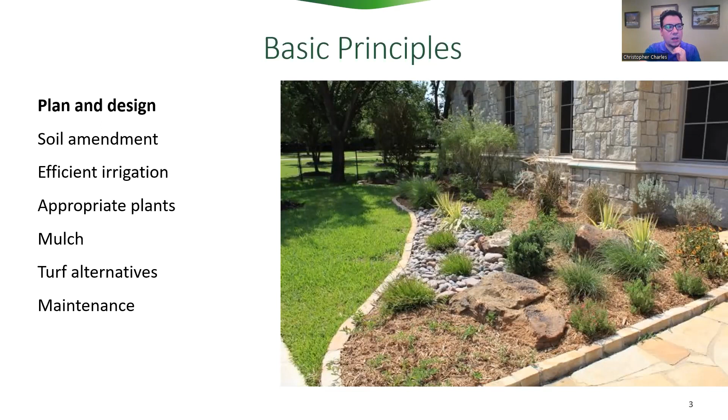As far as turf alternatives, you might have seen things like in this photo here, where they put a little bit of that stone there, and maybe some people will put artificial turf. We're really looking, as far as turf alternatives, at maybe using some native grasses or ground covers. We're trying to stay away from rock and artificial turf, and I'll go through that in a little bit.

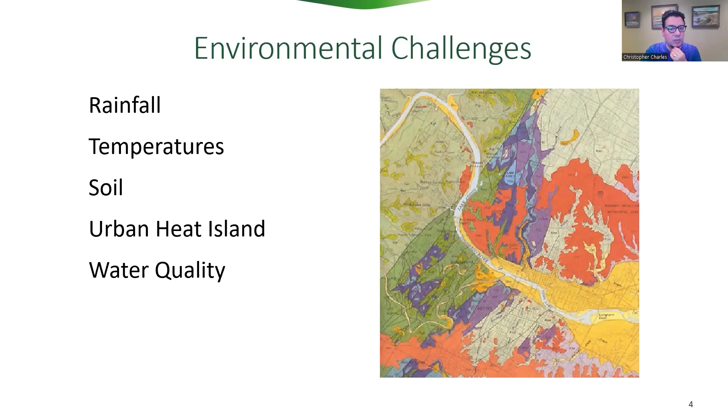So some environmental challenges - you got to understand the local climate. For some people, Austin's a brand new city. All you know is that there's so many allergens right now. But no, we need to really think about what our climate is, how much rainfall we get, look at the temperatures, the soil. What is this urban heat island thing that everybody's talking about here in town? And of course, we always want to take care of our rivers and streams, so we always focus on water quality when we design landscapes here and around Austin.

This was just showing you the vast amount of rain Texas gets - Houston getting 50 inches, Marfa getting around 15 inches, and Austin's right in the middle. One interesting thing is that Austin gets around 34 inches of rain a year, and Seattle, everybody thinks of as a wet town, gets 38 inches per year. The difference is we get all of our rain in maybe 3 or 4 big storms a year, these 3 to 4 inch rains, while Seattle usually gets a consistent amount of rain each year, which is good for their watershed and water supply.

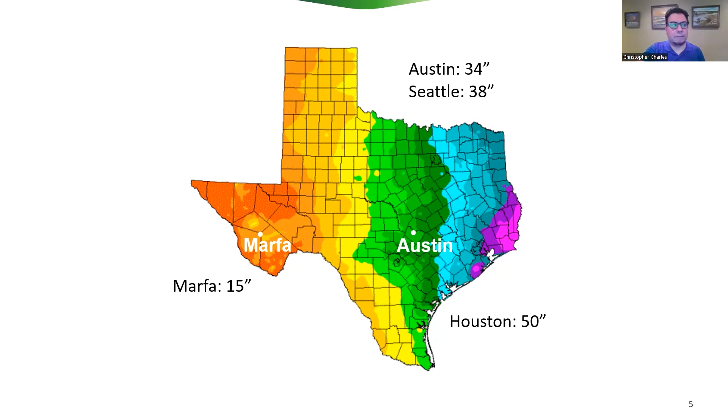Temperatures - a lot of people will look at cold hardiness when they're buying plants, asking will it survive the temperatures here. I just want to let everybody know that plants also have a heat hardiness. You can't plant some of those northern plants here in Austin. What I see a lot is people trying to plant hostas - yeah, they do great in Michigan, but they're not going to be doing good here in the Texas heat. So really look at the temperatures - if you're from out of the city, even if you're from Dallas or even from the Valley, the plants that you're used to might not grow here. So you might want to look at temperatures when you're doing your landscape.

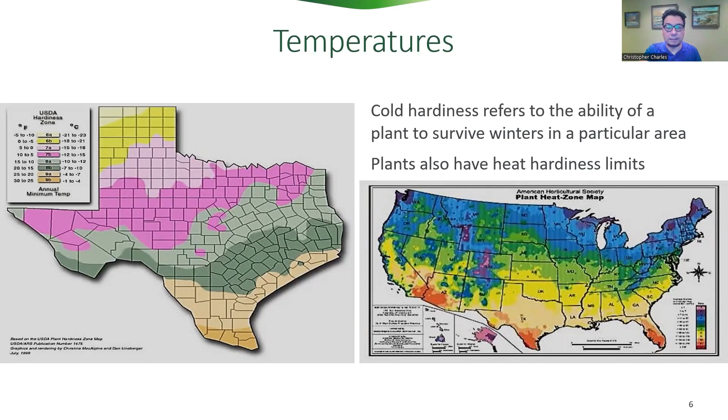Another thing to look at is soils. This Austin area soil is notorious for being shallow, poor, and hard to manage, though that's more true on the west side of Austin. The east side has much thicker, more clay-like soils, so you'll have an easier time digging. On the west side, there are a lot of karst formations and limestone that you really need to take into consideration.

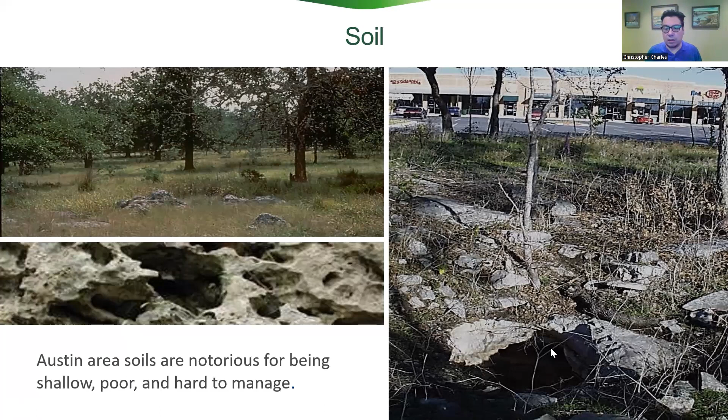Urban heat island is something you might hear about now and then, and Austin's really big on this. The sun bakes down on impervious surfaces, including buildings, creating hotter temperatures in the center of the city compared to the outer rim where there's more trees, forest, and parkland. This is basically Austin, and you can see red streaks going down, like South Lamar, south of the river, and I-35 right down the middle. The cooler temps are in the older neighborhoods away from the streets, where there's nothing but residential and lots of mature trees. So, are you in a cool zone or a hot zone? That's basically what this infrared imagery shows.

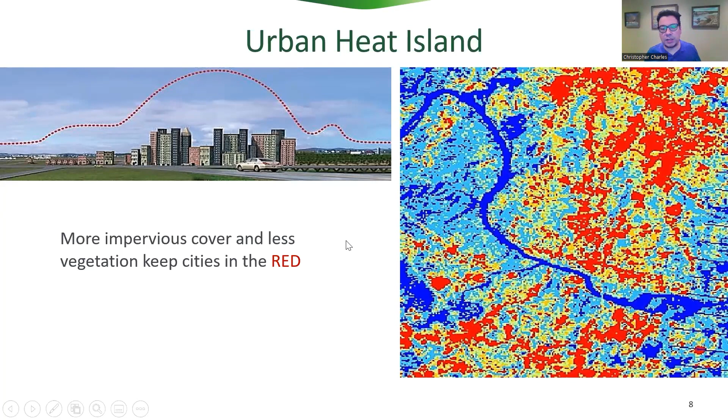Water quality, as we mentioned, we really want to protect our streams and rivers. We also want to make sure that water goes through the soil and infiltrates instead of causing erosion issues. And then there's pollutants as well. We'll be talking about fertilizer later on, and how we don't want that in our creeks and rivers.

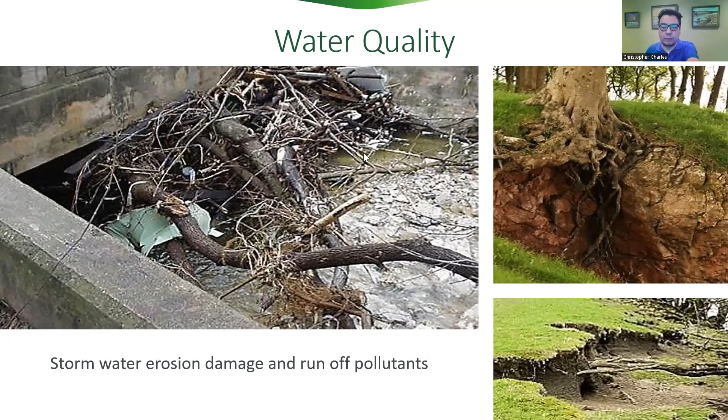Some of the solutions we have for landscaping, looking at everything we talked about previously, is to develop a smart design. I'm not asking you to be landscape architects, but really think about the things that matter to you in your landscape, and how you can environmentally better the situation. Keeping water on the land is always important. A long time ago, the thing was to gutter that water, shoot it down your driveway into the street where it won't damage your property. That's an old way of thinking. Now we do want water to drain away from your house, but we want to try to slow the flow as much as possible.

Consider soil amendments—we'll talk about that a little bit. Use native and adapted drought tolerant plants, create cool spaces, and reduce lawn that isn't being used. If you are using your lawn, then please maintain it in a responsible way, with the type of maintenance that doesn't do damage.

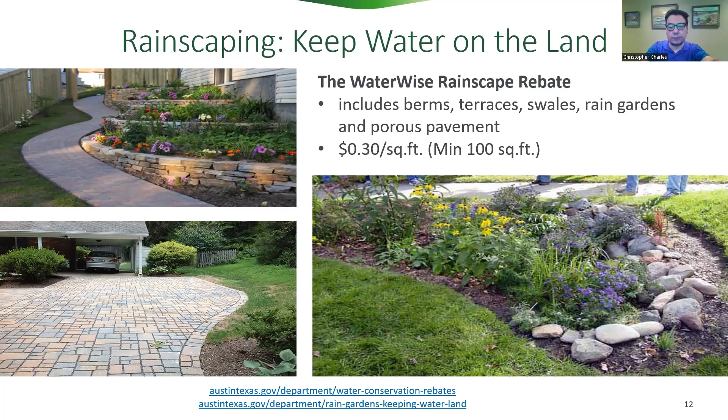Rainwater harvesting - I do have a lunch and learn, I just want to go ahead and put that out there, and I think Pat's going to go ahead and put that link somewhere where you can see it. I'll be talking about this program in major detail for people that are not familiar with this rebate. It's very, very popular. We've had a lot of businesses promote our program because they do like the amount that we're giving.

We're giving 50 cents per gallon for a non-pressurized system, meaning gravity released. But once you put a pump on there, we call it a pressurized system, and we'll give you $1 per gallon. Anything over 500 gallons that's pressurized will need a backflow prevention. That's a requirement, and that's why we're giving a little bit more money for those pressurized systems.

We have a max rebate amount of $5,000, and if it's going to be over 500 gallons, you're going to need to get pre-approved. That's because we want to make sure that we have the funds for you - we don't want to run out of funds midway through your project. It does take a little bit of time, but it's worth it in the end.

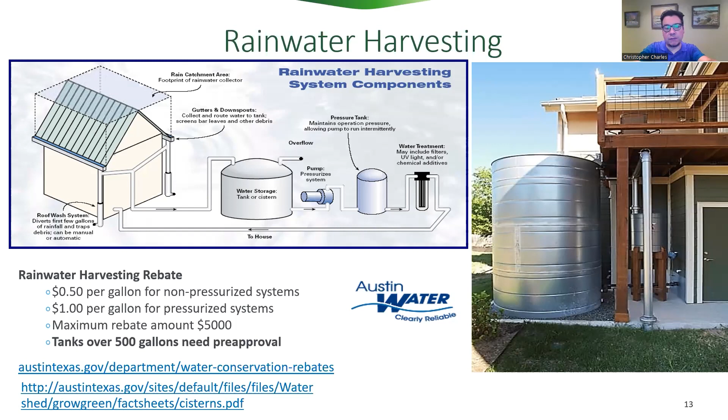One thing that we have going on right now is laundry to landscape. That's basically using gray water, water that comes from your washing machine. If you want to try this simple plumbing thing - basically a three-way diverter that diverts water from your laundry out into the landscape and into a mulched basin - we can give you some money for that. There's more information on that, but it's also good to use gray water to conserve our natural resources.

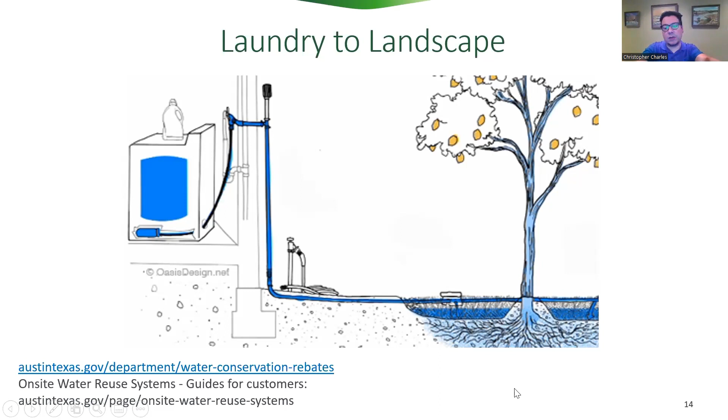So, soil options - there are three things I have here. You can work with what you have: if you only have an inch or two of soil, you can work with that, you might need to add some extra soil or some compost to thicken it up. Of course, amending soil is the next thing - always good to add some kind of compost, mulch, something that will break down and add nutrients to the soil, to make it more viable, to allow the plants to extend their roots and stabilize it.

If you're on a slope, it's always good to use raised beds so that whatever you use—this example is a stone, like river rock—is contained. I don't mind people using gravel or stone if it's in a raised bed where it's not going to go into the street, not going to wash off, and it's going to stay put.

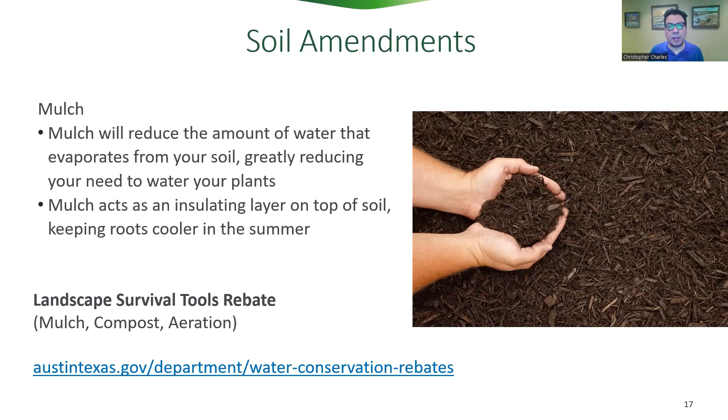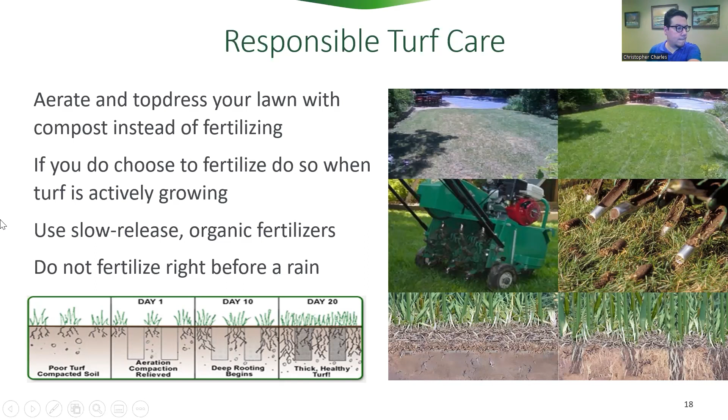A little bit about native and adapted plants. Grow Green has the native and adapted landscape plant guide. You don't need to really know too much about plants to know what works here in Austin.

Another thing we were talking about before is minimizing turf grass in the yard. Now, how are you using the turf grass? Like I said before, dog run, playground, etc. If you're not using your turf grass—lawn, I'm sorry, in the industry we call St. Augustine, zoysia, Bermuda, buffalo, all those grasses that you plant and mow, turf grass—so how are you using that turf grass?

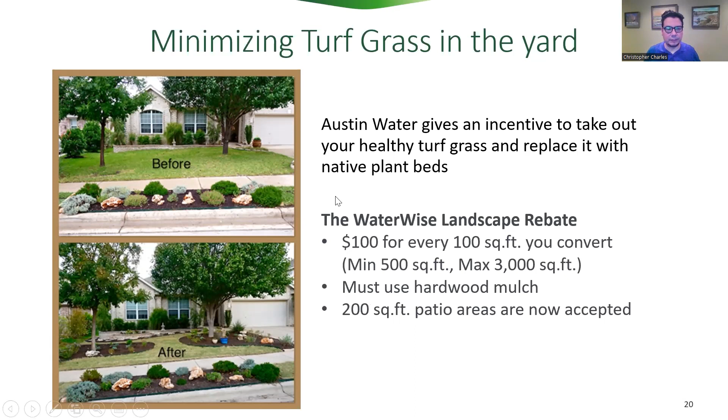Hydrozoning is a term you might not be familiar with. Basically, what we're talking about is where you're going to place the plants, right? If you have a lantana, they like full sun—they actually like the evening sun—but where are you going to put it?

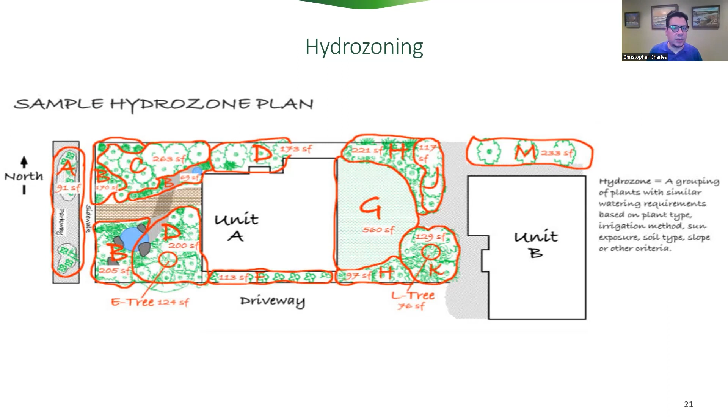Of course, if you look at area D, that's going to have all day shade. So you might want to put something like Turk's cap there, or something that can handle shade. Maybe take out the grass in that area, since it's not going to get enough sun because the house is blocking it. So think about that. That's all hydrozoning is—making sure that you're planting in groups that make sense.

Also look into permeable pavement—I talked about that. We do have a rebate at Austin Water for this. It does cost a little bit, but in the long run you're helping out the infiltration of stormwater. And then think about shade structures as well.

And then, of course, lighter colored pavements. I've seen there was a big trend to use—what do they call it—some black gravel, I think it's called shale, or some kind of chat gravel. If you put it in the shade, I don't see that being a big issue, but if it's going to have any amount of sunlight, that black gravel is just going to heat up and create that microclimate. You're going to go outside and wish you weren't outside because it's so hot. And that's not good—please try to pick lighter colored pavements when thinking about using any type of stone or concrete.

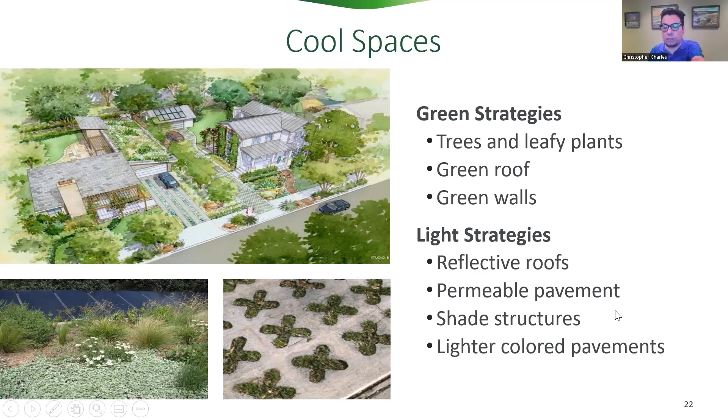I think everybody knows the importance of trees, so I'm not going to go too much into that. It increases your home value - I know I wouldn't have bought my home if I didn't know there was mature trees on it. I thought that was really great. It shades my house part of the day, not all day long, but part of the day, which helps out with energy savings.

One other thing I wrote in my notes - if you're going to try planting trees, try planting on the south and west sides of the house. That way, once they're mature, they'll be able to give you shade on your house and any concrete you have, like driveways, sidewalks, or anything like that.

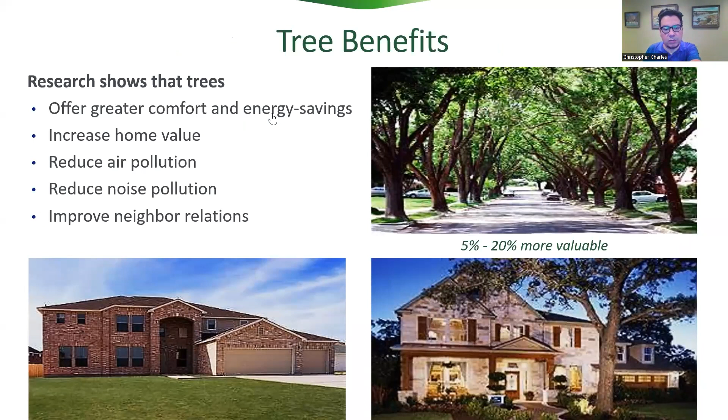Integrated pest management - now, with more plants and less grass you have, you're going to have different plant issues. So you might look into beneficial bugs. There's a lot of resources, like I keep going back to this Grow Green website, but there's lots of resources for it. There's other ways to keep plants healthy without using pesticides, so look into those options.

Some of your nurseries will have organic products which are safe for all your lawn care needs - sulfur powder, different types of diatomaceous earth that will deal with pests. Safe for your pets, bad for pests. So look into those products at your local nurseries.

That is about it for me. I can go forever talking about our water conservation programs, but this is about sustainable landscaping. If you have any more questions, please call our main line or go to waterwiseaustin.org and check out our residential rebate programs. We do offer irrigation audits for those using over 20,000 gallons per month - believe me, that will happen. Some of you might have had a broken irrigation system where the water just kept running, or had multiple run times and didn't understand what was going on until it was too late and you got a high bill. So please check out our website and other things we have on there.

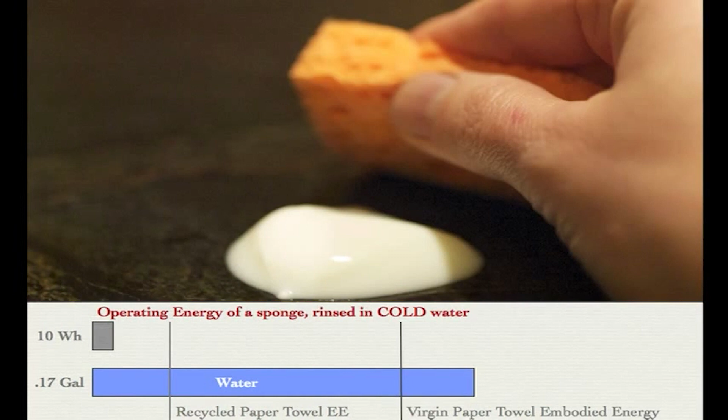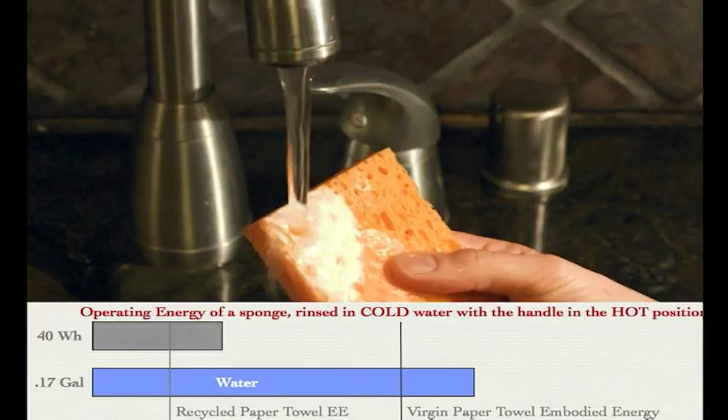But what about a recycled paper towel that comes in those little half sheets? Well, now the paper towel looks better. Screw the paper towels, let's go to a sponge. I wipe it up with a sponge, put it under running water, and I have a lot less energy and a lot more water. Unless you're like me and you leave the handle in the hot position even when you turn it on, and then you start to use more energy. Or worse, you let it run until it's warm to rinse out your sponge. And now all bets are off.

So what this says is that sometimes the things you least expect, like the position in which you put the handle, have a bigger effect than any of those other things you were trying to optimize. Now imagine someone as twisted as me trying to build a house. So that's what my husband and I are doing right now. And so we wanted to know, how green could we be?

There's 1,001 articles out there telling us how to make all these green trade-offs, and they are just as suspect, telling us to optimize these little things around the edges and missing the elephant in the living room. Now, the average house has about 300 megawatt hours of embodied energy in it. This is the energy it takes to make it. Millions and millions of paper towels. We wanted to know how much better we could do.

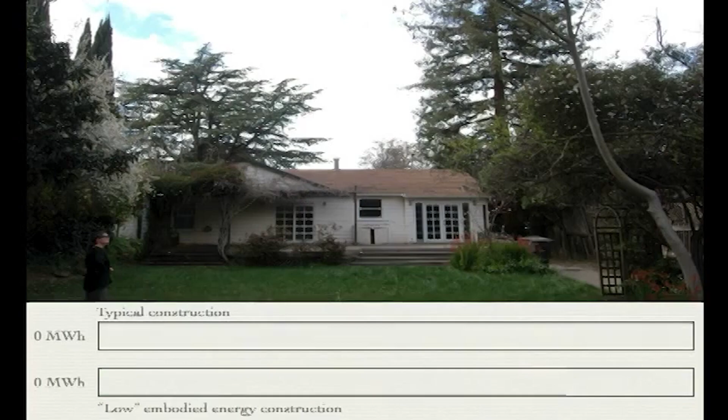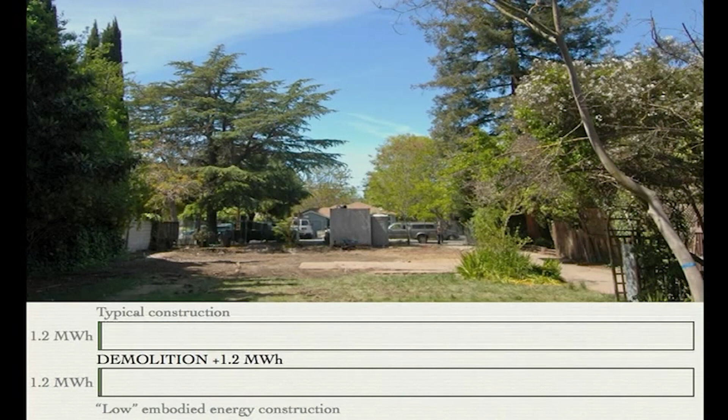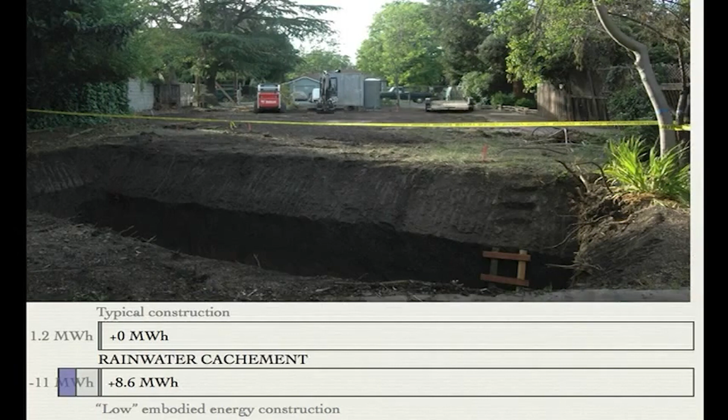And so, like many people, we start with a house on a lot, and I'm going to show you typical construction on the top and what we're doing on the bottom. So first we demolish it. It takes some energy, but if you deconstruct it, take it all apart and use the bits, you can get some of that energy back. We then dug a big hole to put in a rainwater catchment tank to make our yard water independent. And then we poured a big foundation for passive solar.

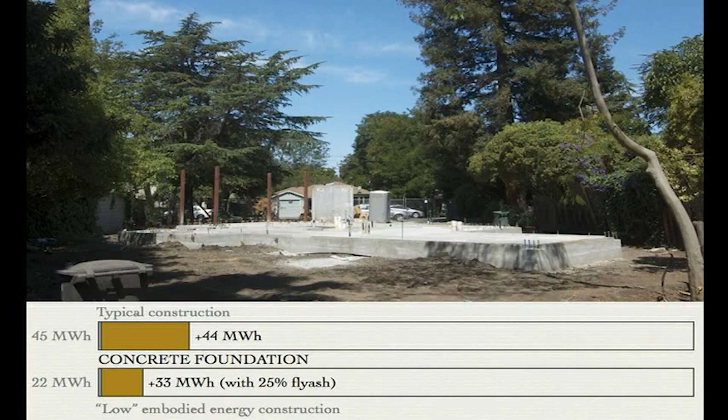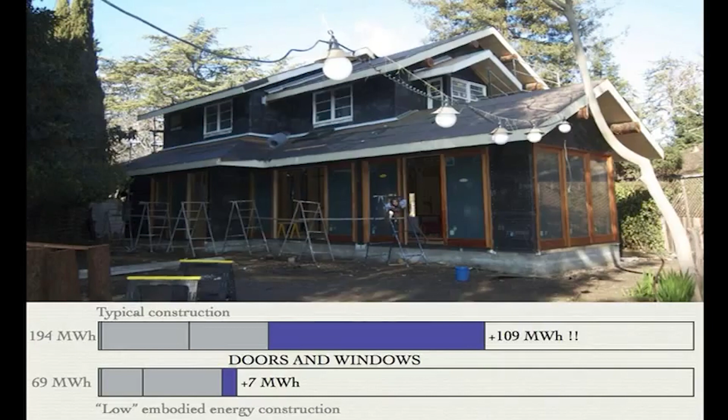Now, you can reduce the embodied energy by about 25% by using high fly ash concrete. We then put in framing, lumber, composite materials. It's kind of hard to get the embodied energy out of that, but it can be a sustainable resource if you use FSC certified lumber. We then go on to the first thing that was very surprising: if we put aluminum windows in this house, we would double the energy use right there. Now, PVC is a little bit better, but still not as good as the wood that we chose.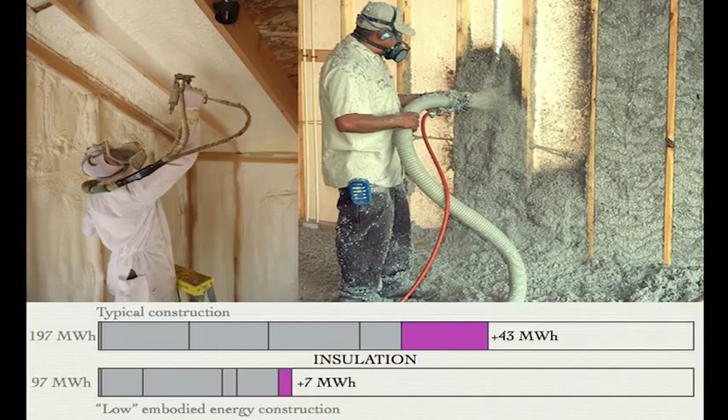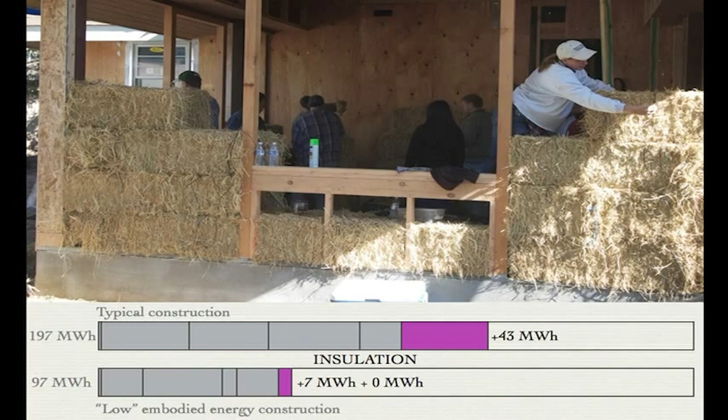We then put in plumbing, electrical, and HVAC, and insulate. Spray foam is an excellent insulator—it fills in all of the cracks, but it has pretty high embodied energy. Sprayed-in cellulose, or blue jeans, is a much lower energy alternative. We also used straw bale infill for our library, which has zero embodied energy.

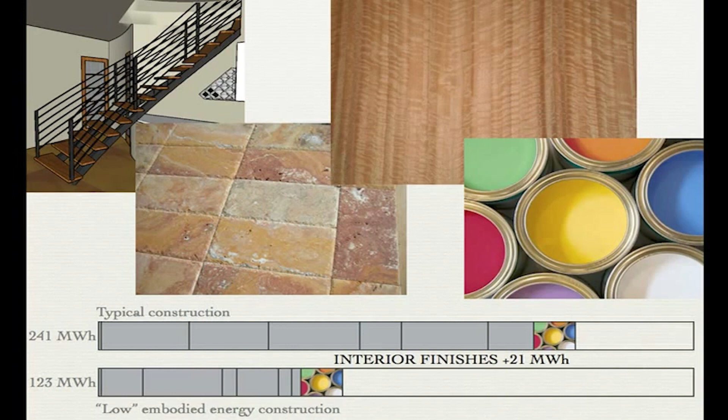When it comes time to sheetrock, if you use Eco Rock, it's about a quarter of the embodied energy of standard sheetrock. Then you get to finishes, the subject of all those Go Green articles—on the scale of a house they almost make no difference at all, yet all the press is focused on that, except for flooring. If you put carpeting in your house, it's about a tenth of the embodied energy of the entire house, unless you use concrete or wood for much lower embodied energy.

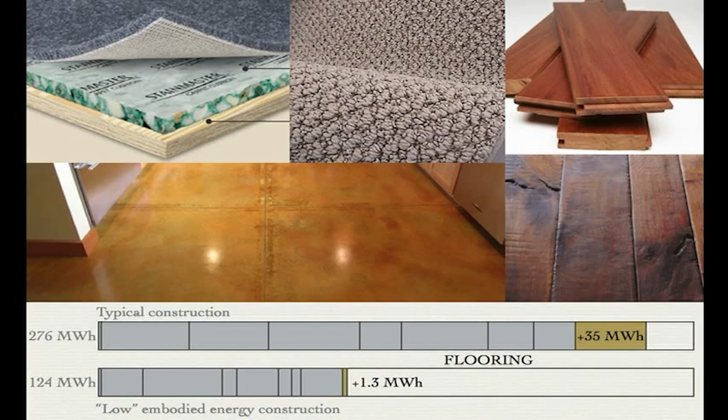So now we add in the final construction energy, add it all up, and we've built a house for less than half of the typical embodied energy for building a house like this. But before we pat ourselves too much on the back, we have poured 151 megawatt hours of energy into constructing this house when there was a house there before.

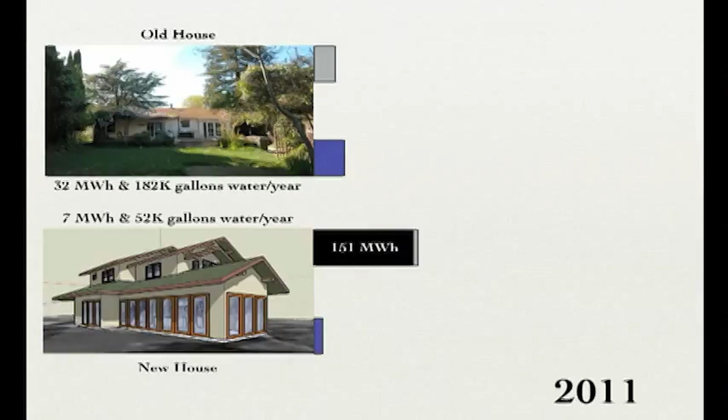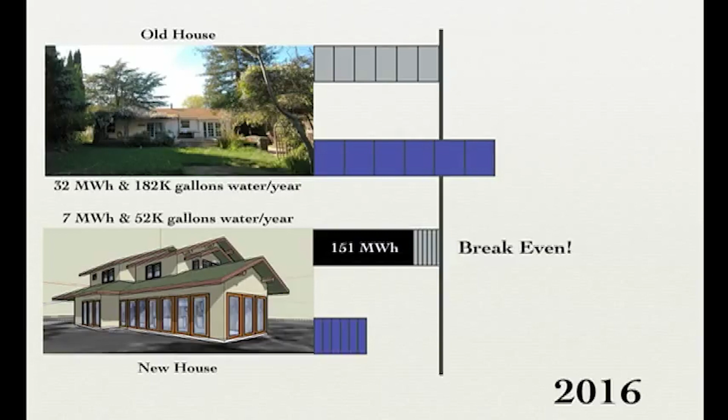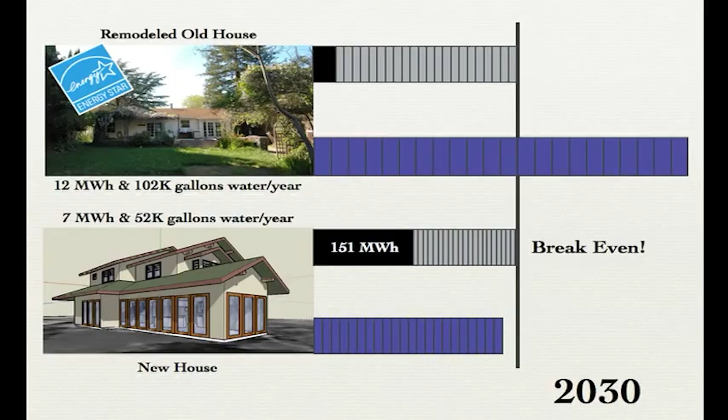So the question is, how could we make that back? If I run my new energy-efficient house forward compared to the old non-energy-efficient house, we make it back in about 6 years. Now, I probably would have upgraded the old house to be more energy efficient, and in that case it would take about 20 years to break even. If I hadn't paid attention to embodied energy, it would have taken over 50 years to break even, compared to the upgraded house.

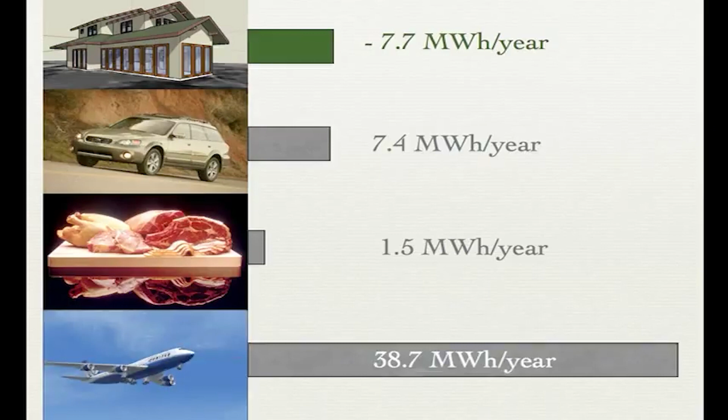So what does this mean? On the scale of my portion of the house, this is equivalent to about as much as I drive in a year—about 5 times as much as if I went entirely vegetarian. But my elephant in the living room flies. Clearly, I need to walk home from TED.

But all the calculations for embodied energy are on the blog. And remember, it's sometimes the things you're not expecting to be the biggest changes that are. Thank you.

I just love that video because it goes into these different decisions we have to make when we're thinking about a remodel or new construction—when and what materials to use, and really what are the effects and perceived impacts that the internet might be telling you are more important than maybe they really are.

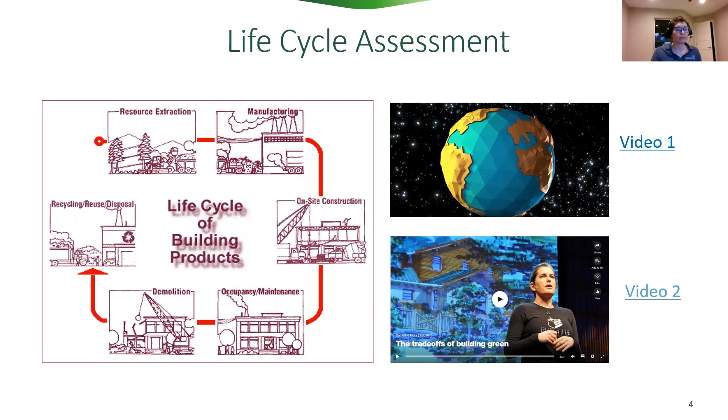So carbon reduction is something the speaker went into a little detail about. Carbon is categorized in 2 ways: embodied carbon, which is essentially the carbon emissions associated with manufacturing, transportation, installation, maintenance, and disposal of the building—all the things that go into all the materials. Operational carbon, on the other hand, is all the carbon emissions released when you're actually operating the house—when you're living there, using the air conditioner, taking showers, feeding the dog with an automated dog feeder or something like that. All that different energy, you can give it an equivalent carbon emission value.

So for those of you who responded that carbon was most important to you, information from that life cycle assessment, along with other tools, can help you decide the best products and materials for your carbon reduction goals. The American Institute of Architects also has a similar top 10 list on their website, and embodied carbon represents the carbon. There's also a materials palette website that gives information.

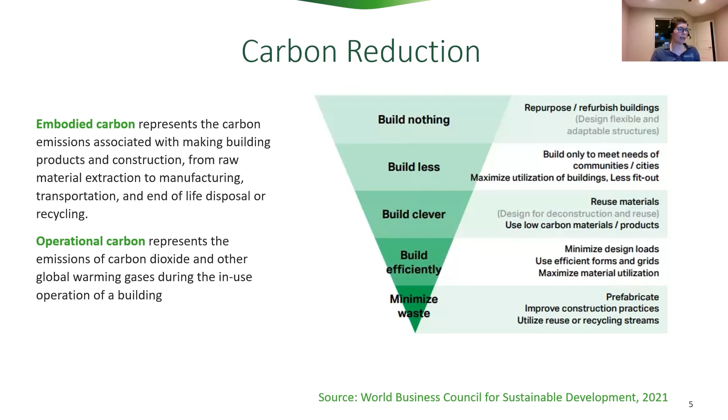So these next few slides, we're going to talk about design, durability, material sourcing, and waste management as an effect on your resource efficiency. Keep in mind that complicated designs require many more resources to build.

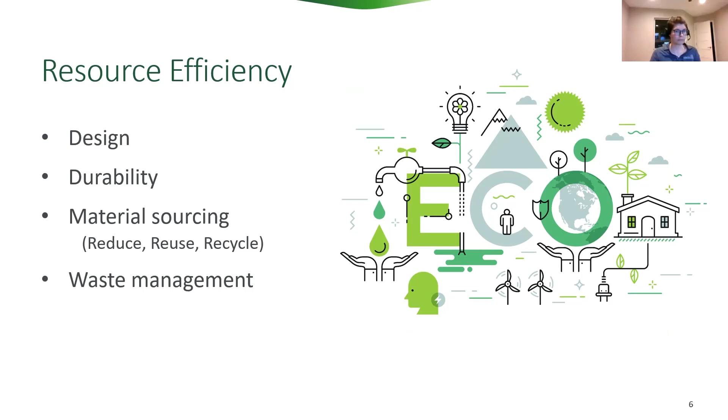So last week you learned it all starts at design, for the lowest initial construction costs as well as long-term maintenance and repair costs. Stick as close as possible to rectangular shapes.

You can find other ways to find architectural interest other than extra corners, dormers, things that jut out and jut in. Every time you create a corner in an exterior wall, you're adding complexity to those components where you have to add more flashing, more framing, opportunities for water intrusion, air leakage, things you have to make up for. Complicated design features also increase the risk for leaks, which over time result in damage to the structure, requiring more resources and money to remedy.

Building up rather than out reduces the foundation and roofing materials. You can combine that with advanced framing techniques that carry the load efficiently from the foundation to the roof and yield significant savings. Another way to reduce the amount of resources needed is to design the home on 2-foot modules, since most building materials are sold in 2-foot increments. So you're buying what they sell and designing and building with those materials, resulting in less cutoffs and more efficient installation and use.

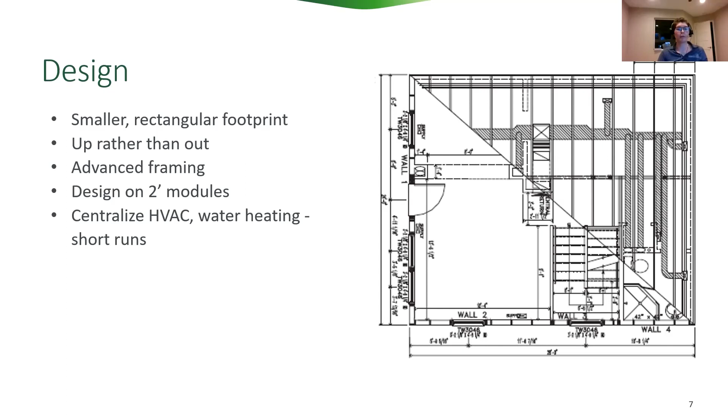Durability. Definitely do yourself a favor and keep durability in mind every time you make a decision. Choose products that stand up against weather and pests and need less maintenance and repairs. Repairs require us to use more resources because the first resources we used just weren't good enough to last.

By using products that require less finishing, like stone or tile, or materials that serve more than one purpose, like concrete foundations as finished floors, you reduce the number of products you need. Use products that are reusable or recyclable in our homes so we can reduce the need to continually harvest more virgin resources. A good example of that, and keeping in mind the idea of trade-offs, is like right now, I'm going through a deck remodel.

My deck is on the 2nd level, and I have to decide what kind of material I want to use. Most commonly it's wood, but there's a popular choice of using ipe, a Brazilian hardwood, and another choice is composite decking. For me, the trade-off is I don't want any maintenance - I've got enough to do in my life than try to maintain my deck if there's a different option. So that ranks higher, and it also includes high recycled content. All those plastic bags you're recycling at Randall's and HEB go into composite decking materials. They're durable and very low maintenance. So those are the trade-offs that make me decide to do composite decking versus ipe - coming from Brazil, those rainforests seem a lot more important where they're at than on my deck.

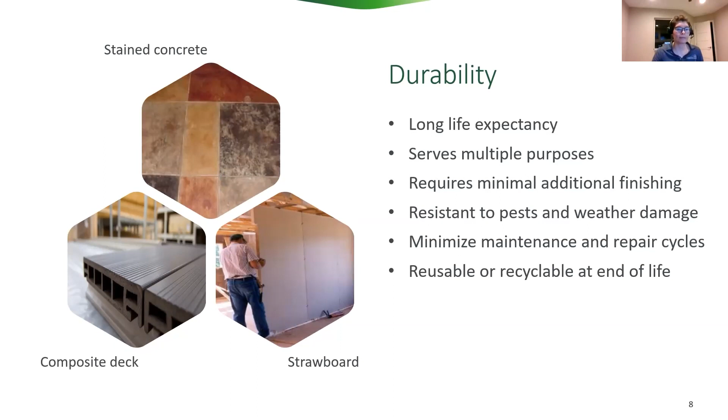To conserve resources, we need to look at the source of the materials and at manufacturing efficiencies. To keep from continually depleting natural resources, we should select products made from rapidly renewable resources, salvage, recycled, or otherwise repurposed from existing resources, and/or require minimal processing and manufacturing.

Locally sourced products within 500 miles of the project don't add a lot of embodied energy from shipping and also support local economies. We have many national manufacturers operating here in Texas, from Southern Pine Lumber in East Texas and Louisiana, to drywall, siding, windows, doors, trim, aggregates, stone, local woods, and flooring.

Consider manufacturers that cycle waste streams back into the product stream. Here in the pictures, at the top right and bottom left, those are pictures from Habitat's Restore. You just go in there and can shop for a door, finding the one that's right for you. The top left picture is a project here in town that was zero waste.

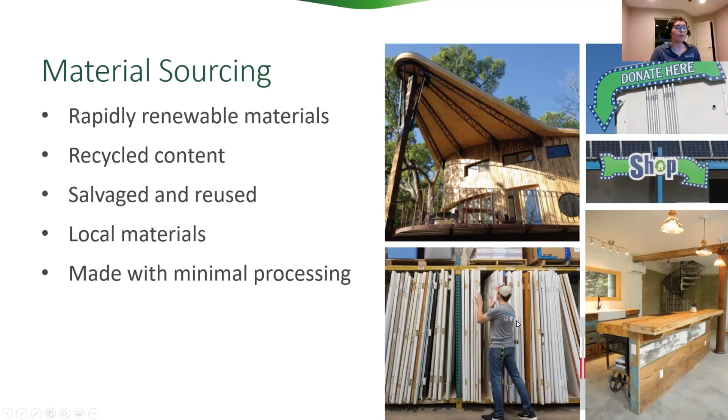They essentially had one regular cart that you would use for weekly trash, and that's the only construction debris they had throughout the whole project. Everything else was recycled, reused, found on Craigslist, you name it, they did it. At the bottom right is another project that used a lot of reused and recycled material - you can see the circular stair in the back and the cabinetry. This is definitely a rustic look, so some of these things have to mesh with your aesthetic, but they're all doable - you just have to design for them.

Waste management. The EPA estimates nearly 600 million tons of construction and demolition debris were generated in the United States in 2017, which is more than twice the amount of municipal solid waste. That's the trash that ARR picks up. So there's a lot of waste generated in the construction industry.

Those wasted materials have gone through the entire linear equation we showed earlier, with all of those impacts, and then they're thrown in the bin and driven to the landfill, hopefully with something pulled out for recycling. Managing and reducing construction waste should be part of your plan for resource efficiency. That was definitely part of my construction specifications for my deck remodel, to hire a local hauler who knows what they're doing and will recycle all they can out of the materials.

You can sort on site, which makes it easier because everything is delineated, but the city does allow lots of haulers to do commingled waste. On site, you can still reuse some stuff, like two studs you have as scrap that can be used for wall blocking for extra accessibility in the house.

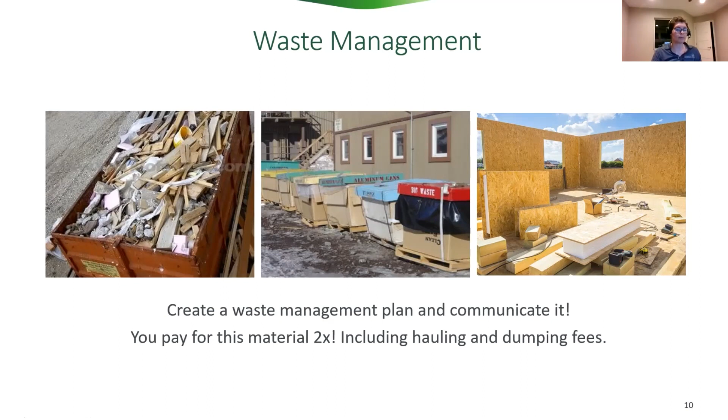Health and safety. I was just asking, this was not an official poll, but how many of you have someone in your family that suffers from allergies or chemical sensitivities? Me, hands up, as you're evidencing tonight. Toxic chemicals are used in everything from construction materials to home furnishings, and those can definitely affect our health and the health of the workers exposed to them during construction on a continual basis. We're going to review a few of those to be on the lookout for.

VOCs is some letters you may have seen - that's volatile organic compounds, toxins released in vapor form. Those can definitely affect the air quality in the home. Formaldehyde, specifically urea-formaldehyde, is used as a binder in plywood and particle board, and in fiberglass insulation. It's trending out of insulation, which is good, but you still have to be on the lookout to avoid those products.

Styrene is used to manufacture some carpets and carpet adhesives. Currently, polyurethane-based foams dominate the spray foam market, so make sure your contractor has been properly trained in mixing those chemicals. Flame retardants are required and they do their job, but those are things people can be sensitive to, and we want to be sure they're not doing more harm than good.

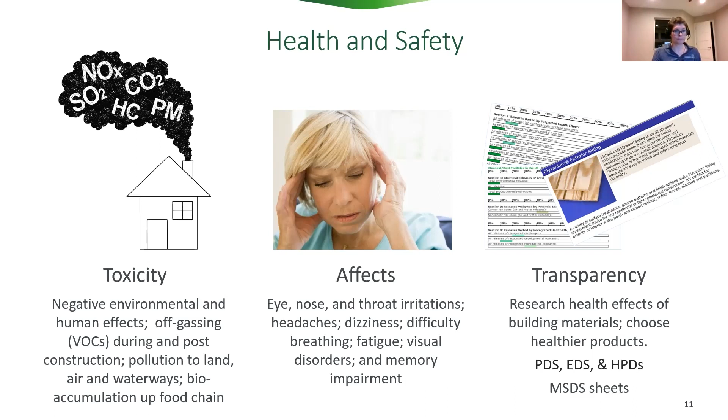My dog just needs to be scratched behind the ear and belly rubs. As long as I'm doing that and feeding him, he's good. He doesn't care about climate change.

So equity is a much used term these days. I'm sure everyone's heard it on the radio or on TV, but we hear words all the time, and they like to hand them out like cards. But what do they mean exactly? You could search the internet and find a million answers.

So the dictionary definition is the quality of being fair and impartial. However, I think it's best understood in comparison with a similar word: equality. Equality has to do with giving everyone the exact same resources, whereas equity involves distributing those resources based on the needs of the recipients. So what do they actually need, instead of just handing them the same as everyone else?

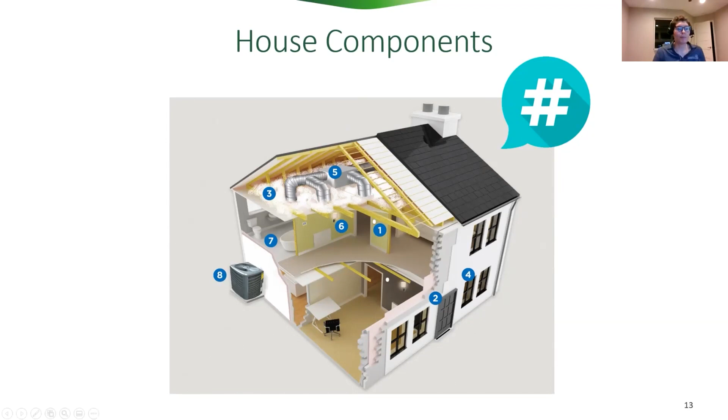So starting at the bottom, the foundation and the concrete. It goes without saying, we need strong foundations. Nobody wants a weak foundation and the house falls down or slides out from under them, or any of those dire things. So we definitely design and engineer the foundation for the site. Failure to do that, or under designing and over designing, that's when we get waste of money, waste of materials, and potential failures.

So Central Texas, where we're at, Chris was alluding to east versus west and soil types. There's just different topologies and soil conditions here. So it's really important to investigate different foundation systems to see what's going to work best for your site.

Concrete itself creates impervious surfaces that increase stormwater runoff, reduce pervious land area available for water to infiltrate back into our aquifer. So using pavers or pervious concrete for the flat work, such as driveways, walkways, and patios, allows the water to infiltrate in.

Like Chris was saying, lighter colored materials have greater solar reflectance to reduce that urban heat island effect. To save money and resources, contractors can reuse the form boards they use for concrete, and they can recycle that with concrete washout systems, which can also be treated to treat toxic materials from concrete truck clean out. So that way you're not carrying that around.

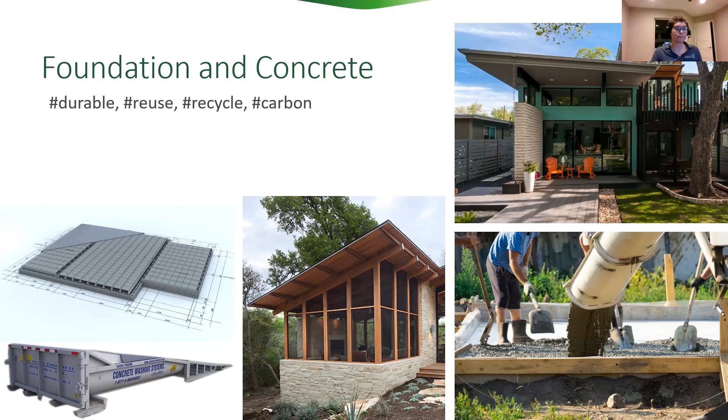Moving up to the framing, apart from using an alternative building system, framing is done with wood or metal, primarily with wood here. Regardless, it's important to verify either the material is installed efficiently and sourced sustainably. Advanced framing techniques that I mentioned before help guide us with that efficient installation.

You can see in the picture at the top right, these are some of the things that you can do. You can stack the framing, two by six studs, 24 on center, right sizing the headers so that way you don't have extra lumber. I think we've all seen it where there's like 3 or 4 pieces of dimensional lumber there, kind of a lumber soup. And again, getting those windows placed so that they fall in those 2-foot layouts, so that these gaps in between are less, that you don't have so many of those. Then your insulation is sized appropriately to fit in there too.

So for the lumber itself, there's 2 third-party certifications that you can look for. That's FSC, and the other one is SFI. Both of those are sustainable forestry certifications, so that you can look to them. They each have their pros and cons, so you kind of have to look to see which one is the thing that you're looking for most.

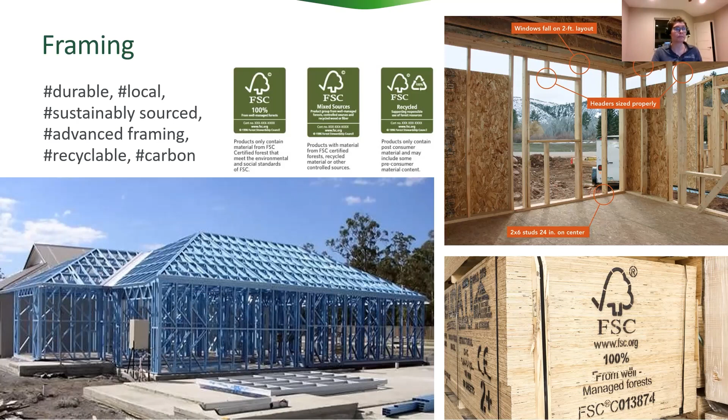Engineered products are structural products made from smaller growth trees and wood waste used in place of solid sawn lumber. The 2 biggest benefits of engineered products are that the waste is cycled back through the production in the manufacturing process, and products are made to the exact measurements to fit the application. So in both situations, waste is minimized. Examples are finger jointed studs.

Here on the left, there are trusses and your structural beams. You can see the material - trees don't grow that way. But like I said, the waste is minimized in that factory setting, and then they're delivered to the job site. And they do provide significant improvements to the structural stability. They're straighter, fewer defects like knotting. They don't get twisted and warping problems that you can get with others. And why that's important is because then that takes even more resources to repair.

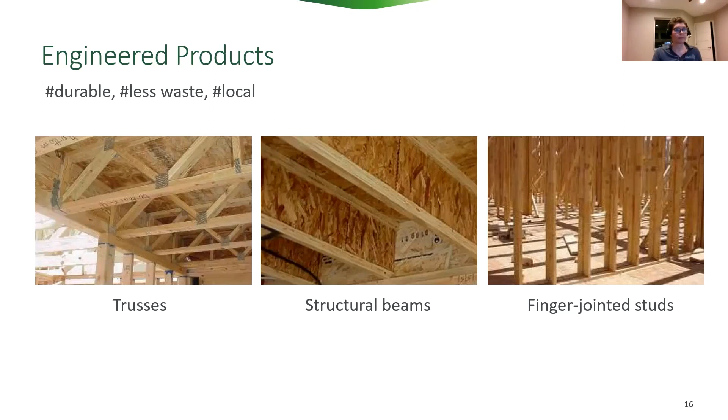Framing alternatives - as mentioned earlier, alternative building or natural building systems, there's a lot of benefits in those, but they're not the most common construction type in town or even other towns. So we're not alone, but we do have some very good architects in town that focus on these types of construction. That is a benefit of Austin and our history with green building. While these systems aren't common, we do have a bench of knowledge in town about them. So if you really are interested in them, I would reach out and find those people that are in town that can do that.

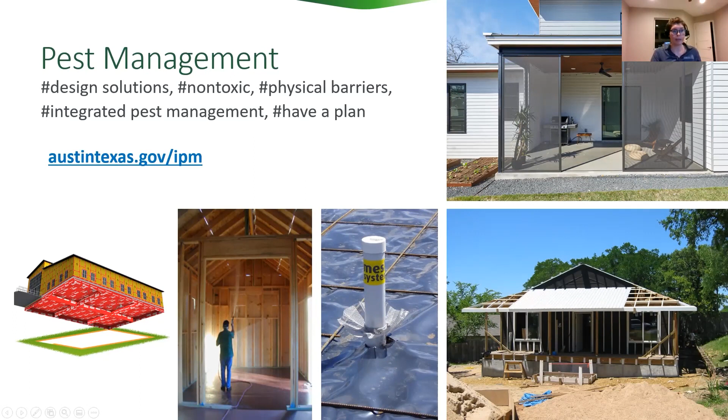Now we've moved up from the foundation. We've talked a little bit about walls. Now we're going to focus on insulating the walls. In that discussion, we're going to talk about air sealing and air barriers, the thermal value, which you'll hear people call the R value, and we'll want to look at the quality of the installation. Those are really important considerations. Insulation can be graded a 1, 2, or 3, where 1 is the best, where you want to be. That's where the manufacturer says it should be installed, and that's less than 2% gaps, voids, and compressions.

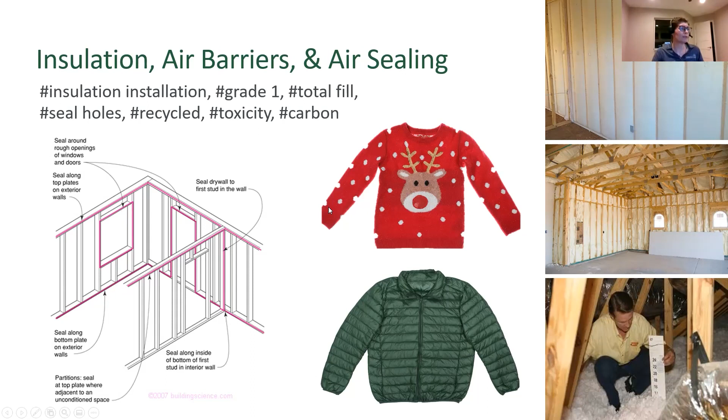Just a side note, I don't think it's done very often anymore, but this is the same reason why we don't do vinyl wall covering in the house. Putting vinyl wallpaper, since that's a vapor barrier, will trap moisture in the wall and make some nasty mold.

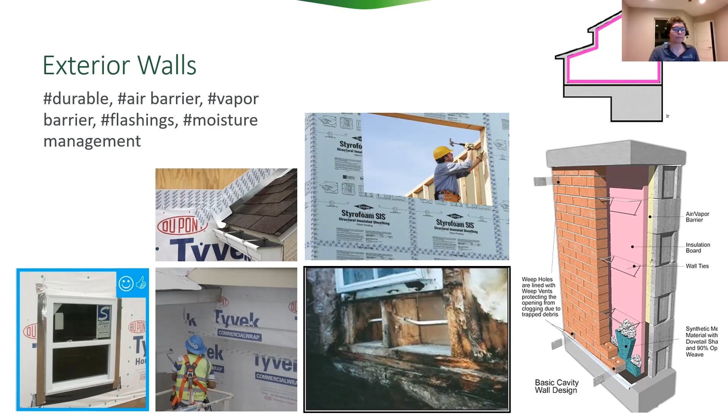Windows, we all love windows, those are the things that let us look outside, look at the view, see the nice green spring trees. But for those windows, we really want to look at the U factor, which is a measure of heat loss. The lower the U factor, the greater a window's resistance to heat flow and the better its insulating value. So the lower the better.

Solar heat gain coefficient is another number to look for, and that measures how much solar radiation is admitted through the window. Again, the lower the better. I'd say that one's a little bit of a limiting factor though - you can get too low, because don't forget, we actually do have a winter. It's not like Canada or even Oklahoma, but sometimes we do want some solar radiation in the house during those times of the month.

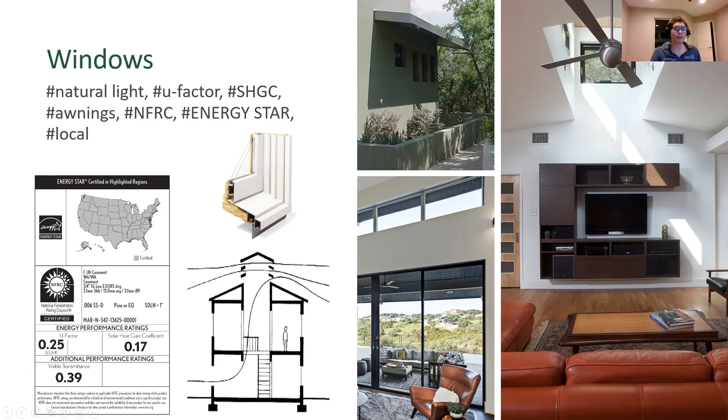So in my house, when we did our first remodel, because we definitely bought a fixer-upper, we do have a big window, but that's the one that goes out to the back, to the green belt, looks at the nice, pretty trees right now that blocks the view of 360. And that was definitely worth it. Most of the other windows are just for daylighting. So just know what it is that you want it to do and utilize that.

The windows can come in different types. There's casements where you turn it open, turn it closed. Awnings and hoppers are very similar. Horizontal sliders, single hung, double hung means it can go up and down from the top. These are great because you can leave it closed at the bottom and just crack it at the top, let some heat out. And at night, let some cool air in. So it kind of depends what it is that you're wanting it to do.

Sunrooms are not really appropriate in our climate, neither are skylights because of that heat load on our roofs. So think about clerestories instead of skylights, or think about solar tubes.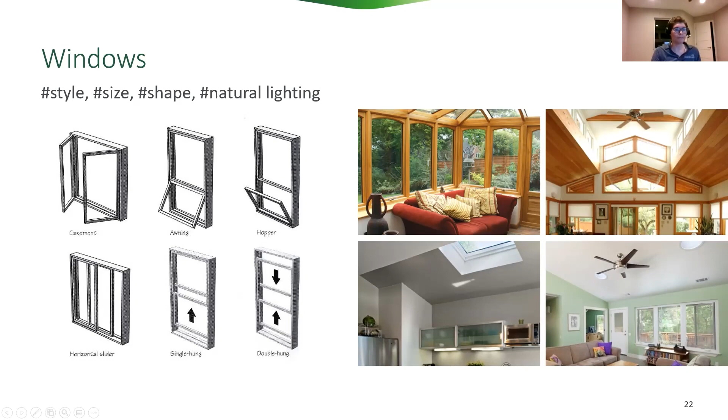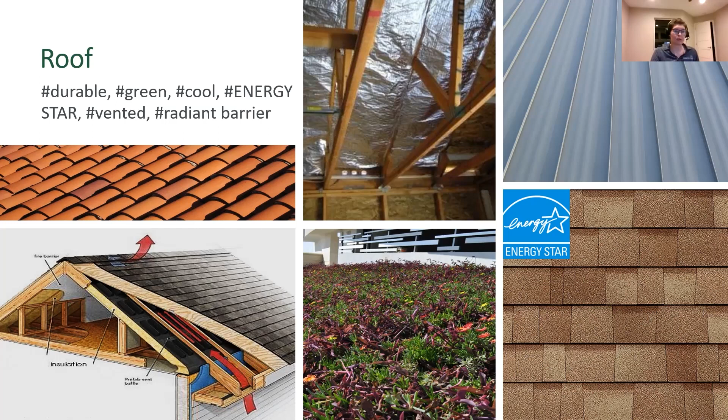So we went through the whole house. How well did we do? One way we can tell is with thermal imaging.

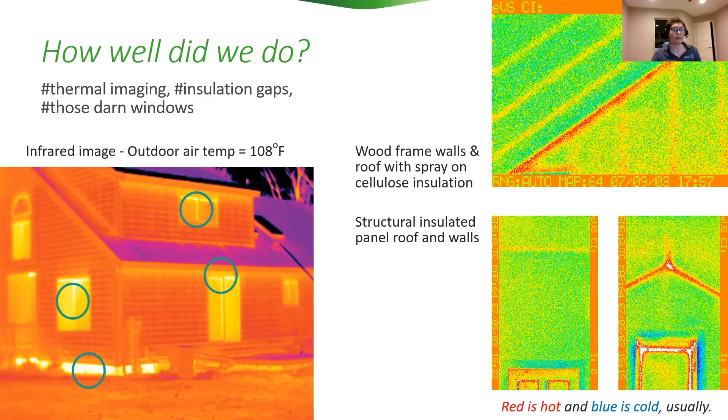But that's kind of how you look at it. This is a way of commissioning your house—commissioning just means making sure everything was done and installed as it was supposed to. You can do this with an IR camera yourself, or there are contractors who do energy audits and many of them have this tool as well.

Now we've gone all the way outside through the components of the house, and now let's look inside.

We're definitely looking for durable, healthy, classic features and finishes. Those VOCs I mentioned earlier, released in vapor form, can affect your health, so we want to be on the lookout for those—in paints, adhesives, glues, and furniture. Using classic styles and colors makes it less likely you'll want to redo or replace them, which just means more resources and more money over the long term.

We recommend that you select products that require less finishing and use non-toxic cleaners.

For flooring durability—that's why I emphasized it at the beginning—you want a durable, hard surface floor with long life expectancy and low toxicity in the adhesives and binders. You can use natural materials like linoleum, tile, or bamboo, which has gotten quite popular. Cork is still there, along with stained concrete, local woods, and salvage woods. There are a lot of different things you can look at.

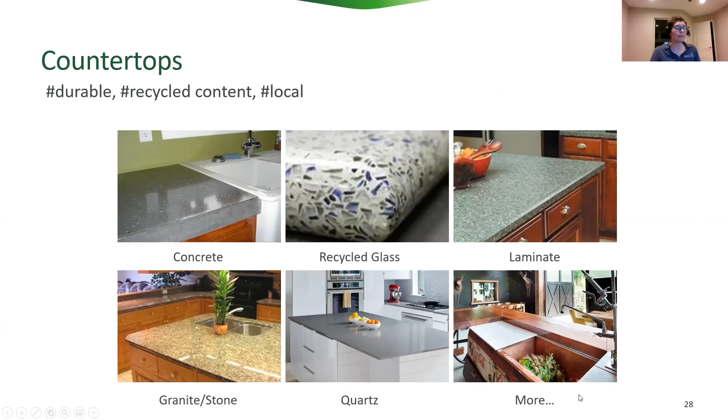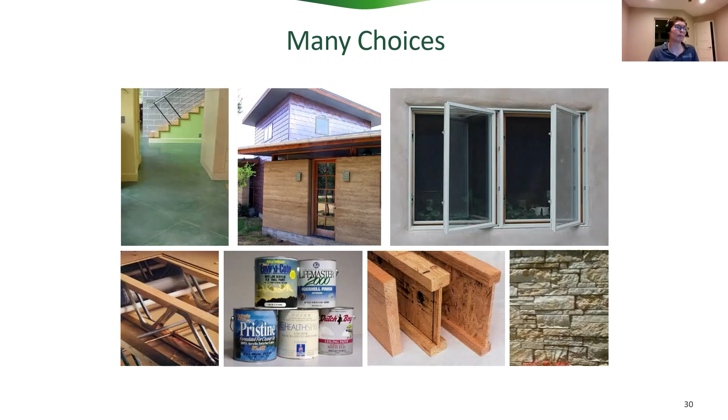Our homes are made of lots of stuff, and all of that stuff has impacts. Unfortunately this is the hardest part, because a lot of people want me to tell them what products they should use, but I don't know what your values are. What's your guiding light? What's most important to you? A lot of you said energy efficiency, and I've told you to look for R-values, installation quality, and U factors. But in the end, you have to put down those goals, those trade-offs of what you're willing to emphasize more and what you're willing to emphasize less. That's how you're going to pick the products and materials that will work best for your project.